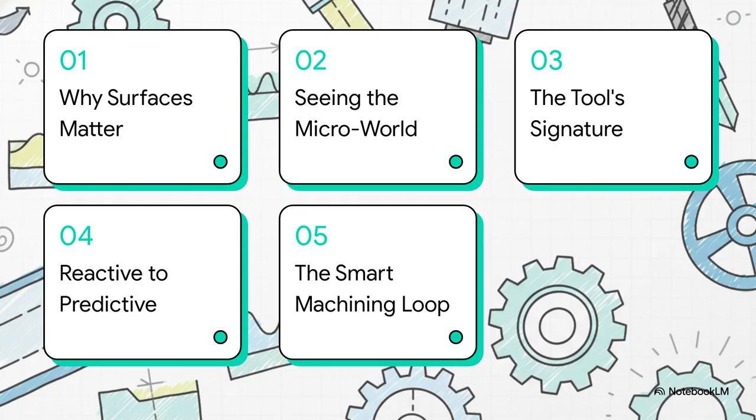All right, so here's the game plan. We're going to start with the basics. Why do surfaces even matter so much? Then we'll take a peek into the micro world to see how we actually measure them. After that, we'll look at the tools that leave their unique signature on every part, explore the huge shift from just fixing problems to predicting them, and then wrap it all up with this amazing concept of a smart machining loop. Okay, let's jump right in.

When we're talking about high-stakes industries like aerospace or medical implants, the quality of a surface is so much more than just cosmetic. We're not talking about a pretty shine. We're talking about the core performance and safety of a component. So to really wrap our heads around this, let's just start with a question. If you could zoom in, way in, like 1,000 or even 1,000,000 times, what would a perfect surface actually look like? You might be surprised to find out it's not just some perfectly flat line.

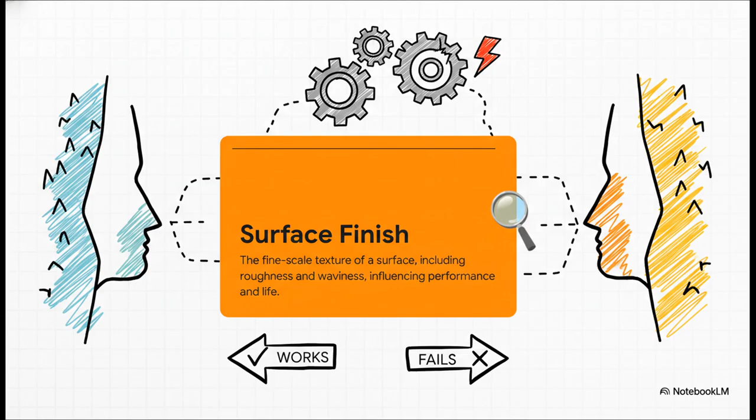And this really gets to the heart of it all: surface finish. That's the technical term for the entire microscopic landscape of a part. It's made up of these incredibly tiny peaks and valleys, which engineers call roughness and waviness. And believe it or not, this invisible texture can be the difference between a part that works flawlessly for decades and one that fails when you least expect it.

So, if this tiny, invisible landscape is so important, how in the world do we actually see it and measure it? Well, that brings us to the really cool science of metrology, the science of measurement. Okay, so there are basically two main ways to do this. The classic way is the contact method, using a superfine stylus. Seriously, think of it like a high-tech record needle that physically traces the surface. It's perfect for checking a part after it's been made.

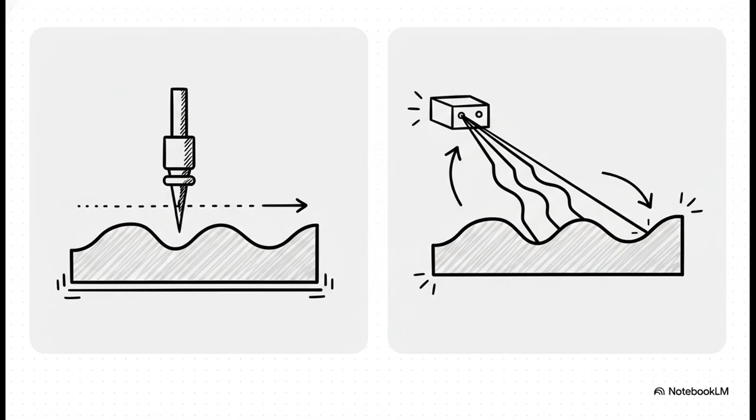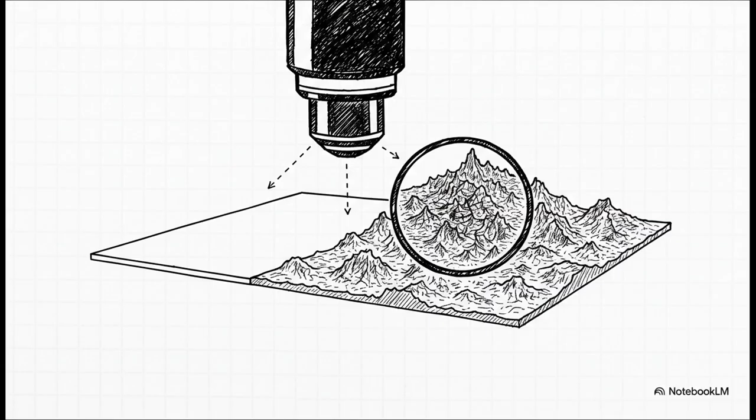But the real game changer? That's the non-contact methods. These use light and lasers to build a detailed map without ever touching the surface. And because they don't touch it, you can measure the part while it's being made. Now, check this out. This is a technique called focus variation microscopy. The easiest way to think about it is like a super-powered 3D camera for microscopic worlds. It builds this unbelievably detailed topographical map, and it can see subtle patterns and tiny flaws that older methods would totally miss. This is the kind of detail you need to figure out the root cause of a critical problem.

So, if microscopy is like taking a super high-res photo, then laser scanning is like shooting a continuous, live video feed. By building lasers right into the manufacturing equipment, engineers can literally watch the surface finish being created in real time. This completely changes the game. Measurement isn't a final inspection anymore. It's a live data stream you can use to control the whole process.

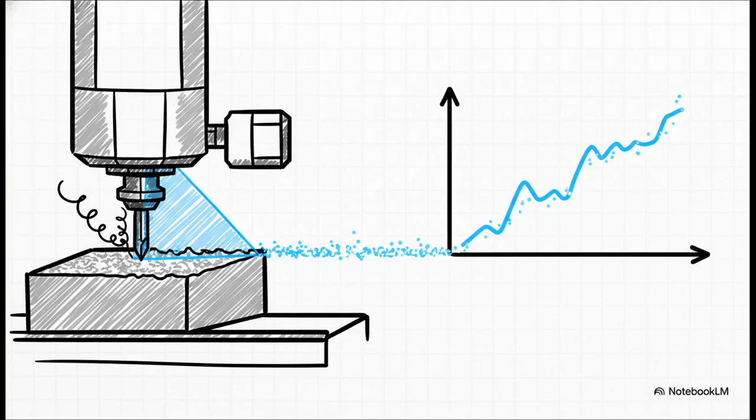But wait, what's creating these tiny peaks and valleys in the first place? Well, a surface is always a direct reflection. It's like a signature of the tool that made it. So if you really want to understand the surface, you first have to understand the health of the cutting tool itself. And this right here, this is the absolute key to everything.

The very second a cutting tool starts to wear down, even by a microscopic amount, the quality of the surface it's creating starts to get worse. The two are just directly, completely linked. There's no way around it. If you want to control the surface, you have to monitor the tool.

And using that real-time laser scanning we were just talking about, researchers have actually mapped out this predictable life cycle. It's fascinating. A brand new tool starts out in a stable phase, right? It makes a really consistent, high-quality finish. Then, as it starts to wear down, the surface gets a little bit rougher, then a little rougher still. And finally, just before the tool is about to fail completely, you see these sudden, massive spikes in roughness. This predictable pattern is the key to what comes next.

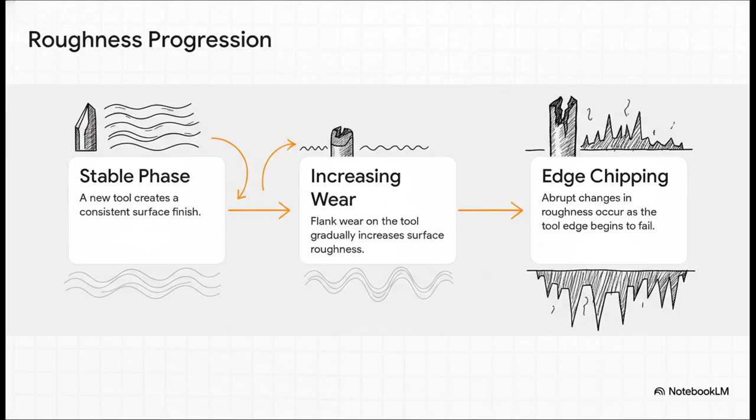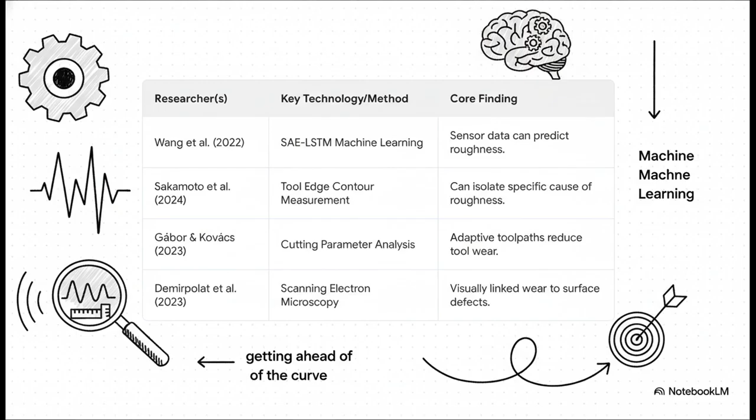You've got researchers using machine learning to listen to the vibrations of the machine. Others are taking these incredibly precise measurements of the tool's cutting edge. They're all basically attacking the same problem, just from different angles, all trying to predict the quality before the part is even finished. And the key here is that modern machines are being packed with all kinds of sensors.

They're effectively listening to the sound of the cut, they're feeling the forces and vibrations, and they're sensing the temperature. Every single one of these data streams is like a clue, and a smart machine learning model can put all those clues together to get a live, up-to-the-second understanding of how healthy the process is.

So, what's the end game? Where does all this lead? Well, when you combine this real-time sensing with that intelligent prediction, you get to the ultimate goal, a machine that can actively manage its own quality. This is what we call adaptive machining, and it is a massive shift from the old way, where you just set your parameters and kind of hope for the best.

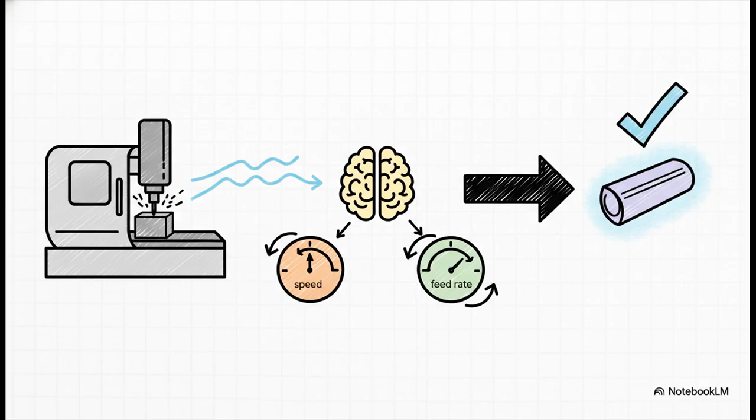Now, the machine itself uses that live data feed to constantly tweak its own settings, adjusting its speed, its feed rate, all on the fly, to guarantee it hits a specific quality target every single time. And this slide just lays out that cycle perfectly.

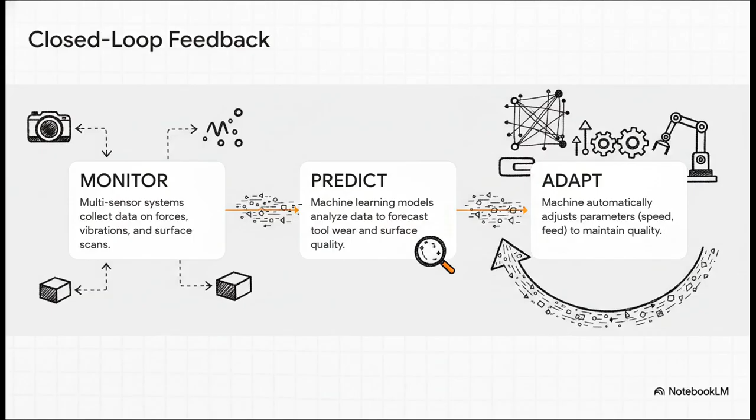Step 1, monitor. Collect all that sensory data coming off the machine. Step 2, predict. An AI model analyzes that data to forecast what's about to happen. And step 3, adapt. The machine automatically changes what it's doing to compensate. This monitor, predict, adapt loop just runs over and over, creating a system that literally corrects itself.

And the payoff for all this? It's huge. As the research makes clear, this data-driven approach delivers on 3 massive promises. You get higher, more consistent quality in your parts, your really expensive cutting tools last way longer, and the entire operation just becomes more efficient, which saves time and cuts down on waste.

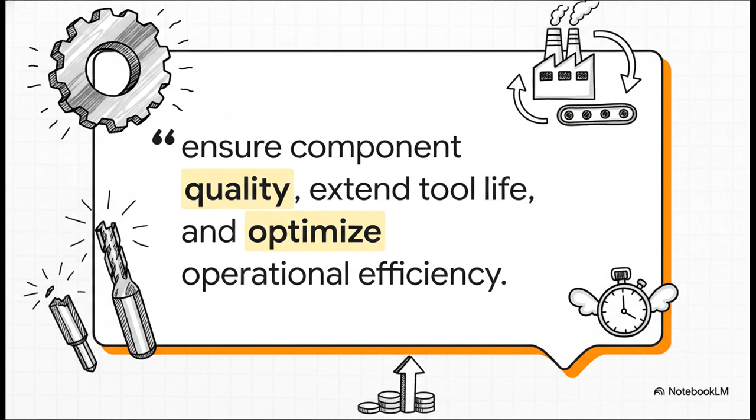So let's just end on this thought. In a world where machines can see, predict, and adapt to guarantee their own quality, what even happens to the idea of quality control? It stops being this separate inspection step at the end of the line, and it becomes this intelligent, integrated part of the production process itself. And that right there is a truly fundamental change in how we make things.